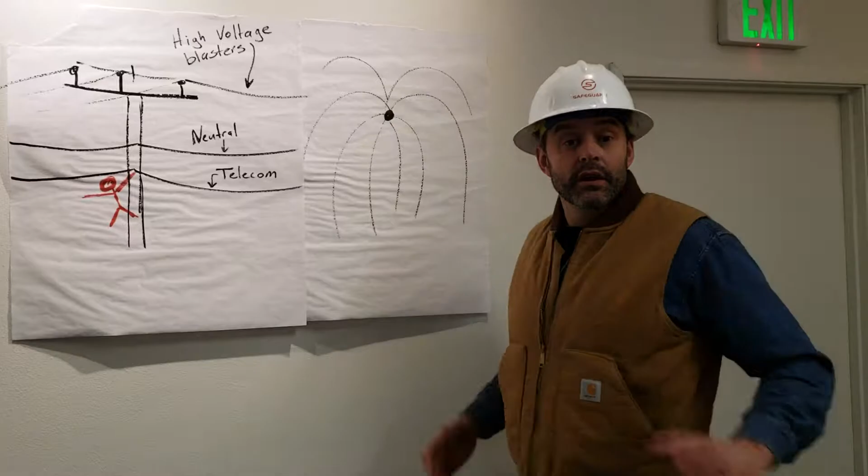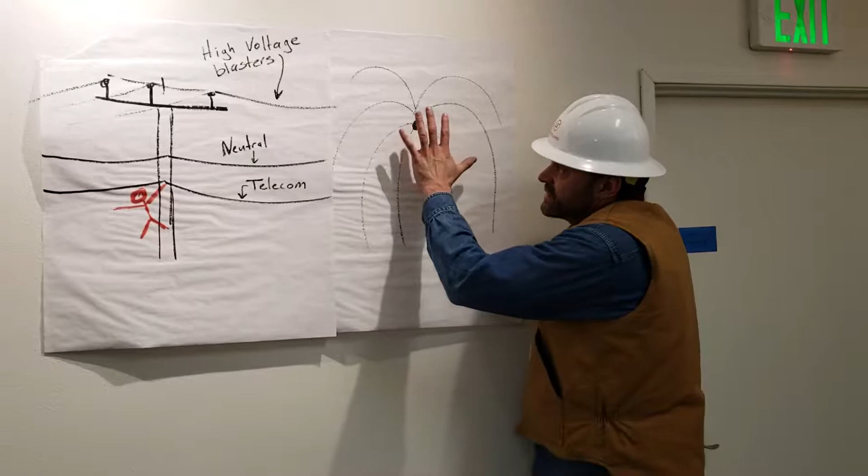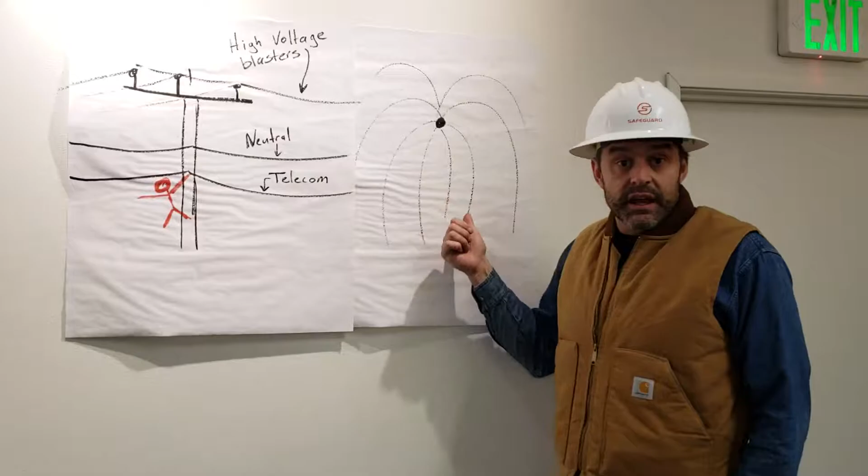This is a video we wanted to make about the adaptive sensitivity settings for the Safeguard Compass. The Safeguard Compass has got such amazing technology that it is able to take the electric field that comes out of a high voltage conductor and use that information to help the wearer understand where they are in relation to the energized conductor.

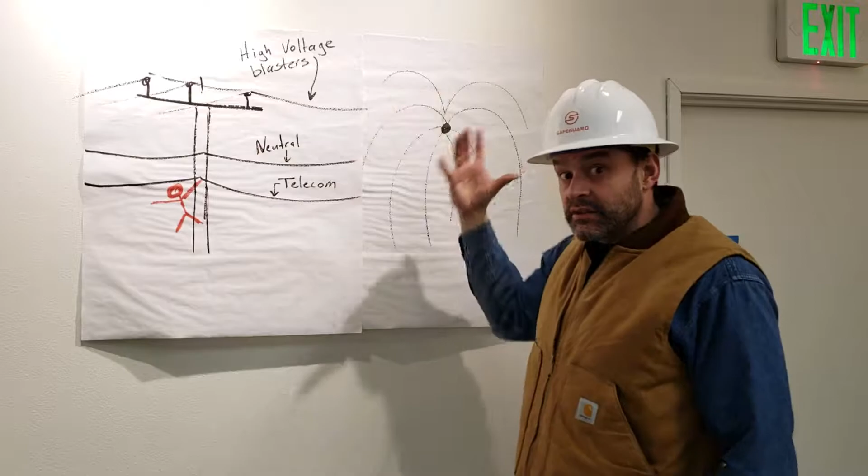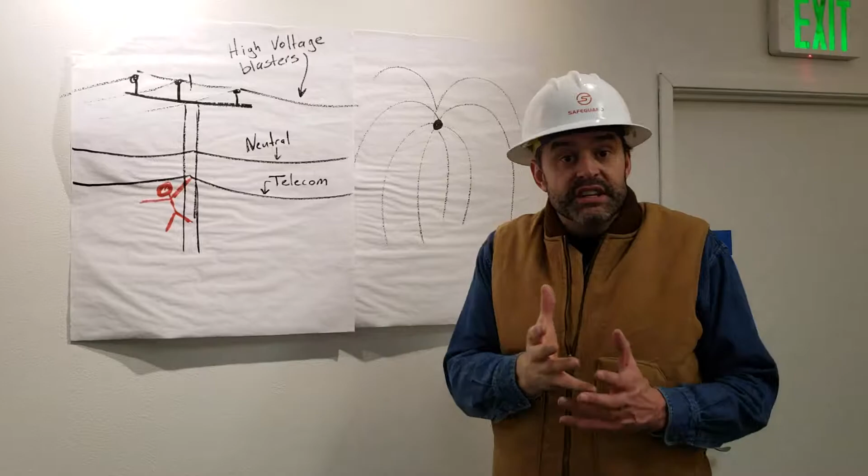So here's an example of a way that you could use the adaptive setting. If you had some conductors that were energized, that had an electric field on them, and you knew you were going to be working at about the same general proximity, and that was a safe distance from those electrical conductors, with your compass unit set in the adaptive mode, you would hit the sample. You just hit the button once. That tells the compass unit, hey, take a sample of this electric field environment right where I'm at.

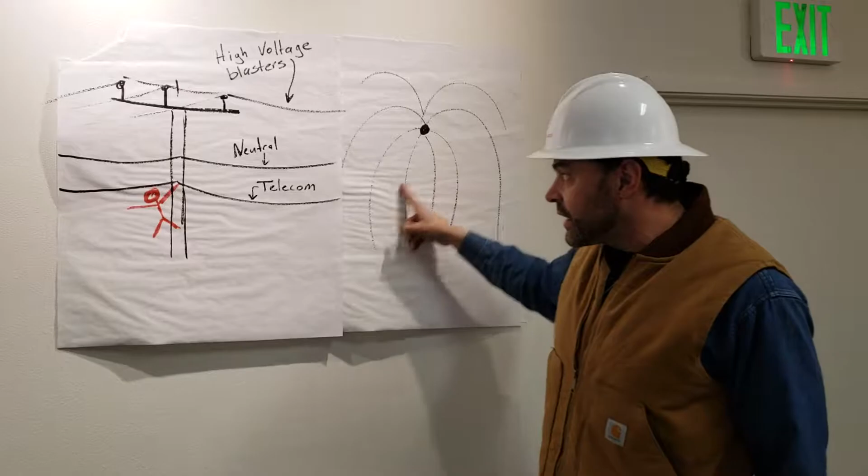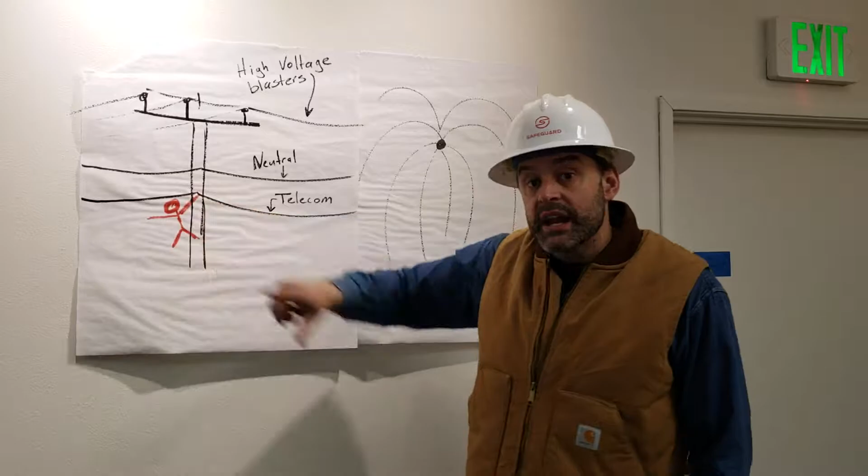And then after that, the compass just sits there constantly listening, constantly surveying that electric field environment, and it doesn't go off again unless you start to get closer to the conductor. So telecom workers are somebody who really like the adaptive setting. Also people that work in the vicinity of high strength electric fields from substations and large transmission lines.

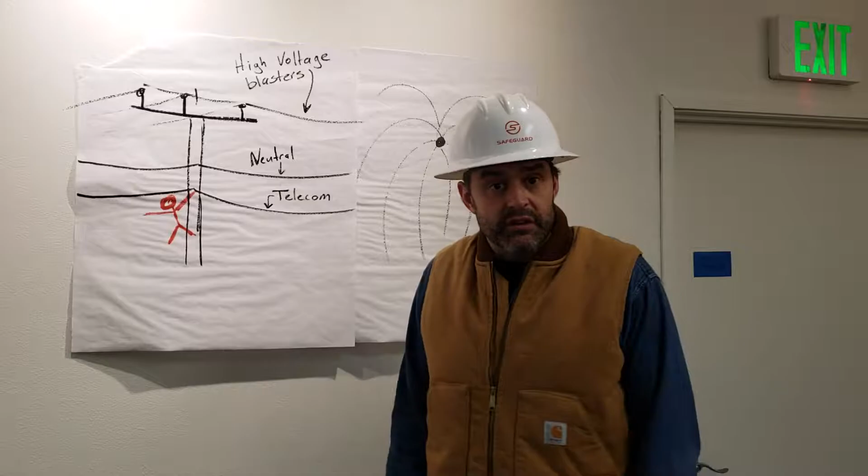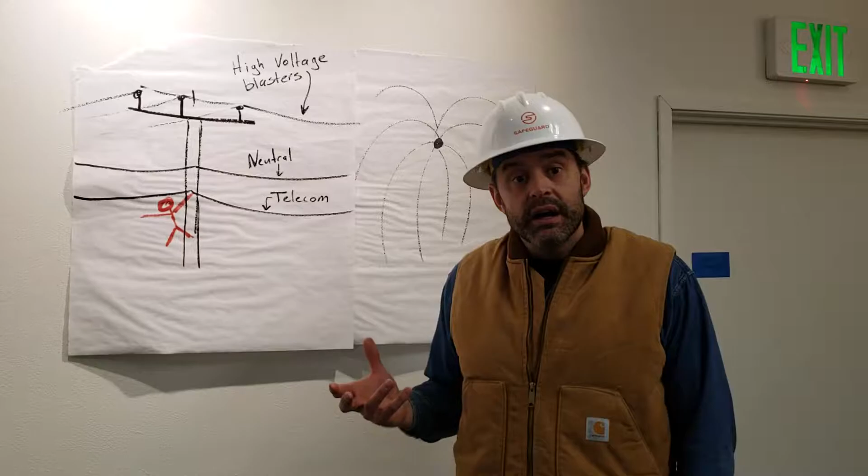So watch it now as Bob and I manipulate the voltage on a conductor in order to trigger the adaptive sensitivity setting. Okay guys, so Bob's got his unit set in the adaptive mode right now, and with his compass unit in the adaptive mode, it's listening to that electrical field that we've got around our conductor down there. Now, the electrical field is determined by the voltage of the circuit. So there's a couple different ways that we could change the intensity of the electrical field on Bob's compass unit.

One would be to turn the voltage up. The higher the voltage, the stronger the electrical field. The other one is the distance. The closer we get to an electrical field, the stronger it gets. So Bob is going to use the adaptive setting here, and he's going to approach that conductor to a work location that he knows is still a safe work location to be, but he doesn't want to go any closer than that. And when he does that, he'll hit the sensing mode.

He'll hit the button once, and the compass unit will take a snapshot of the electrical field level at that distance away from the energized conductor, and that will be its new alarm threshold. And then we'll be able to watch Bob move back out of that distance, and the compass unit will not give him any triggers until he gets back up into that distance away from a conductor again. So, are you ready, Bob? I'm ready. Okay, let's do this.

Okay, so now watch as Bob moves up on the conductor. And he's got his compass unit set in the adaptive mode. There we go, it's starting to go off. Now Bob, as a qualified electrical worker, could work at this physical location from a conductor, and if he wants to temporarily mute his alarm settings, he just presses the button there.